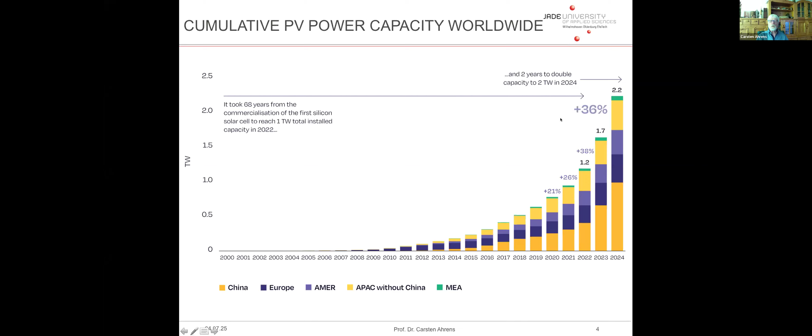What is the amount of PV waste? I use this from my colleagues from solar materials. You can see we are now here. We have worldwide an amount of about 250,000 tons of recycling volume, and the contained raw materials value is about 100 million euro. This is just for the years from 2022 till 2035.

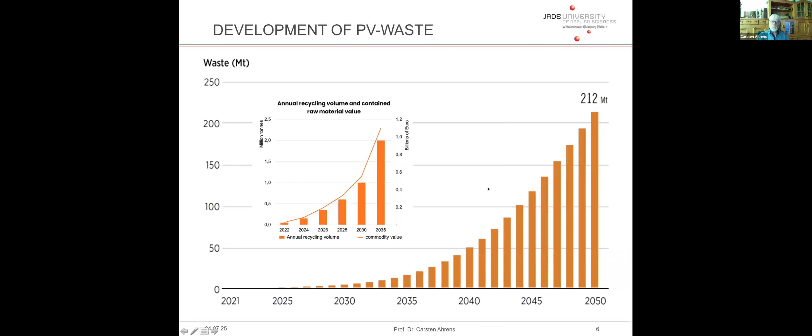If you see the whole development, you can see that it is estimated that we come up in 2050 with a volume of waste of 212 megatons. And if it is underestimated, as WFEO did before, then it could be much more. And if you see that with the amount in tons, you also see billions of material value, then you come up with volumes with worth which you cannot neglect.

The United States are, like Europe, on a rather high level. 220 gigawatt are installed, but most of it is within utility plants, where you harvest the solar. The second part is the residential part, which uses photovoltaics on roofs, for example.

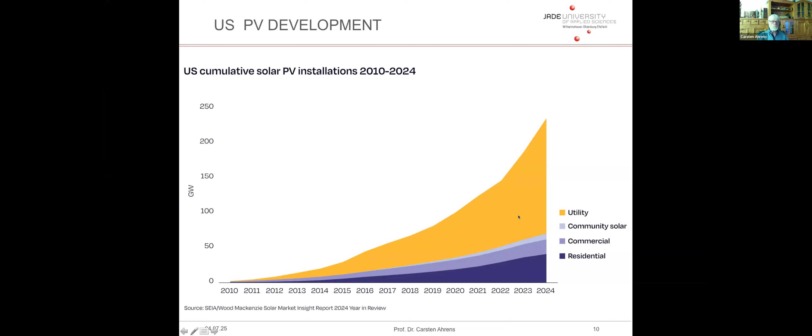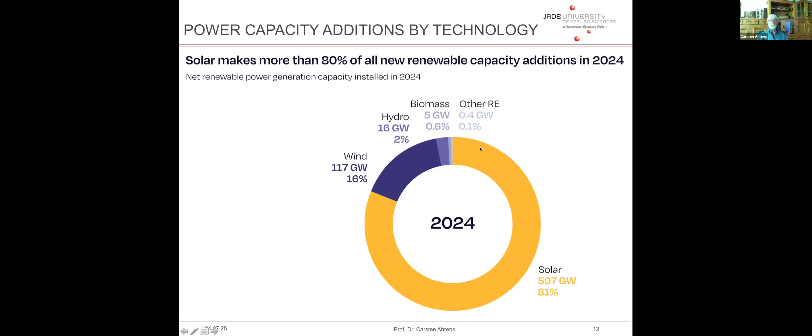If you have a look at all renewable capacity additions in 2024, you realize that solar is by far the biggest one. More than 80% of all renewable capacity additions are due to solar. Wind is the next portion, and all the other three can be nearly neglected.

If you compare it with other technologies, you can see coal and natural gas, the lines are going down, the slope is decreasing, whereas wind and solar are increasing. Solar is the strongest increasing power, and this or the next year, it will reach the coal line and then will become the biggest share of cumulative power capacity compared with all the others.

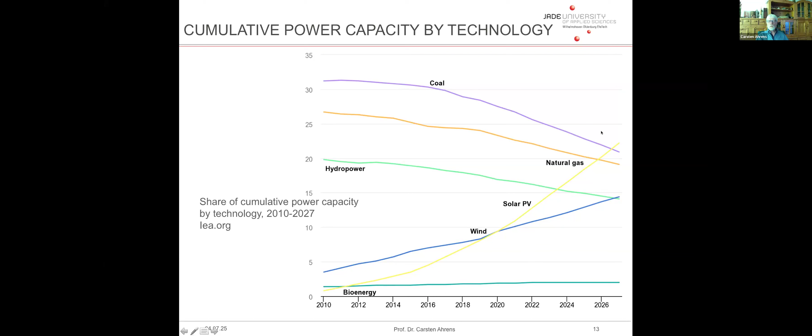So it is very important to think about the necessity for recycling. Just in Germany today, we talk about 60,000 tons of used photovoltaic modules which reach the end of their lives, and many will be disposed, likely also by landfill methods. But in 2030, a quantity of 1 million tons is expected. Then it's no longer possible to fill the land with this. And that's just Germany, so you can imagine worldwide it is a multitude of this number.

And these numbers have to be reinstalled. And in addition, a multifold has to be added to reach the net zero goals. But still, the existing shortage of rare elements becomes a real problematic bottleneck and could really stop further increase of photovoltaic electricity. So there is a need not only to recycle, but to install a circular PV economy. Germany hopefully could become the first country to do it on an industrial basis. This is what I hope for all of us.

Regarding the achievements we have with photovoltaics, you, Marie-Line, talked about the goal of clean and affordable energy for all people in the world. There's another goal, number 12, which we also have to look at: doing more and better with less, not throwing away all the material we used in photovoltaic modules. We have to recycle them and possibly reuse them in a way which makes it also interesting for companies involved in recycling processes.

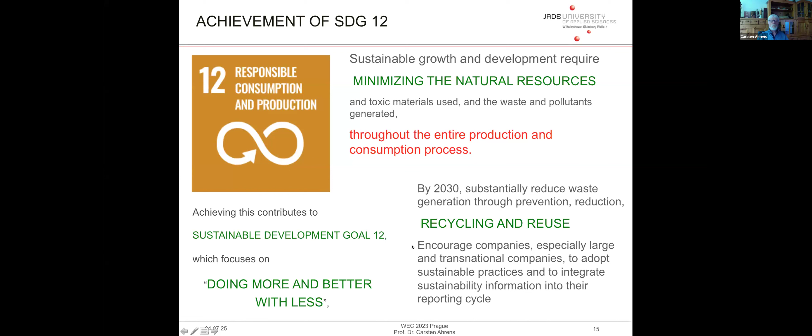The circular economy, as I told you, is a big part of the objectives within the EU, and in March 2019, the adopted comprehensive report on implementation of circular economy also included photovoltaics.

In Germany, we have at least two companies, Fraunhofer Center for Silicon Photovoltaics, together with Reiling, and Solar Materials. These both started to recycle on an industrial scale, and one of the results is these PERC solar cells, which are made from 100% recycled silicon and reach an efficiency of 19.7%, which is very good.

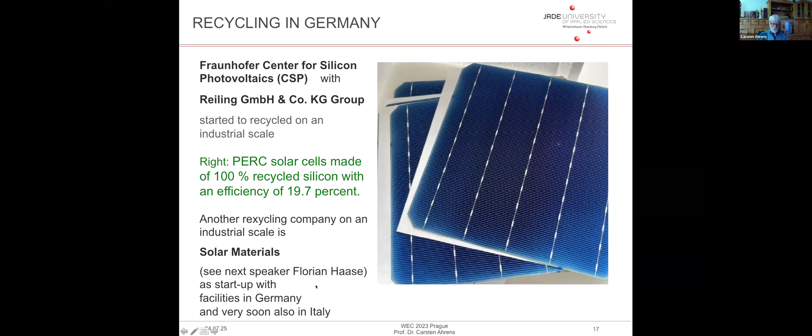And Solar Materials, our next speaker, Florian, as a representative of Solar Materials, is another very thrilling startup company with facilities in Germany and, as he will tell us, soon also in Italy. So it is a real European outlook for us. And this is the outlook which we need.

The outlook and the facet of this outlook should be sound industrial recycling of PV modules, which is interesting not only for these two companies I talked about here in Germany, but there are still some barriers in all countries. For example, a survey of US policies and initiatives by NREL identified several barriers. For example, there are data gaps about the amount of photovoltaic modules at the end of lifetime.

They talk about inadequate recycling technologies, and also this recycling is always connected with 100%, but the share is very often much lower. There's no infrastructure to collect these photovoltaics. There are regulatory uncertainties. When does a photovoltaic module reach its end of life, couldn't it be used longer, and so on.

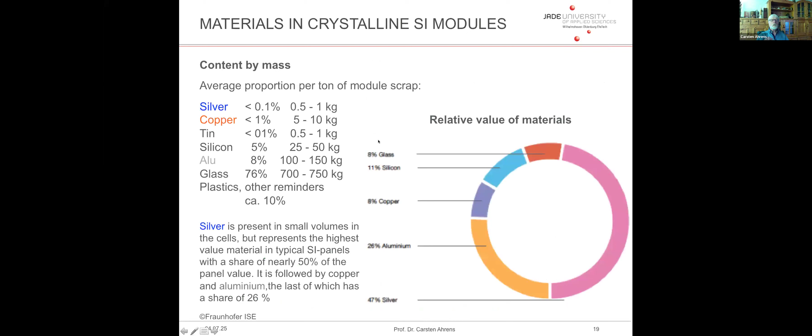So my end: PV electricity in a circular economy. This is a need for the energy future. Thank you for listening.

It's a great pleasure to present to you our solution for how to deal with the very strongly increasing amount of end-of-life solar panels. For this, we will present our recycling technology based in Magdeburg, Germany. We invented a technology that allows us to recover all materials, including the high-value materials, silver and silicon.

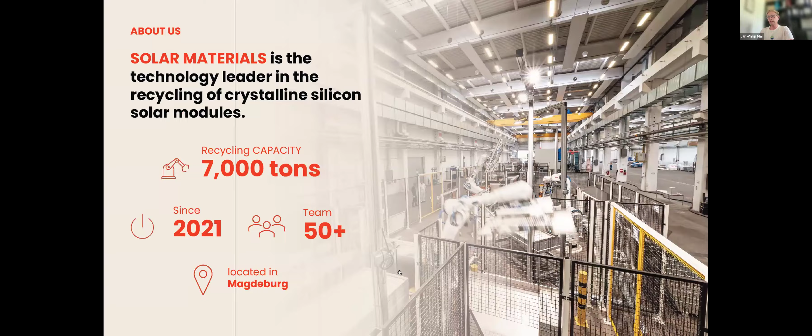For this we started in April this year with our industrial recycling line in Magdeburg, with a capacity of 7,000 tons per year, which is about 350,000 modules per year. And with this technology, we are using a reverse production process. So we remove every material layer by layer.

So we remove the glass section on the top, remove the very strong and difficult-to-handle fraction of the EVA film, get to the most valuable core of the solar cell, the silicon and the silver part, and then also remove the backside, which is also a plastic part.

We have identified 3 different types of end-of-life. There is the normal or typical technical end-of-life, which is about 25 to 30 years, the real end-of-life of the solar panels. But then we also see the very early loss of modules, at about 10 to 12 or maybe 15 years, with some production errors.

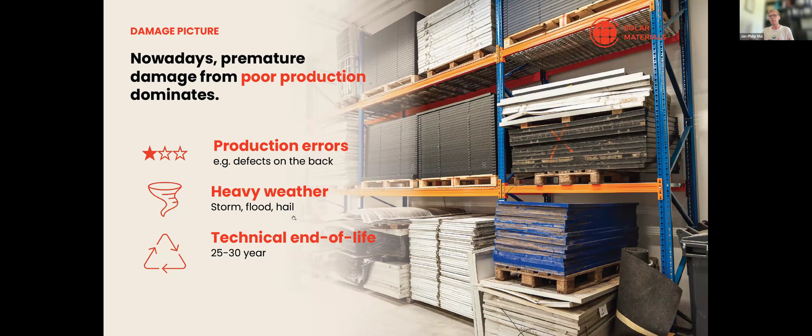There are some modules with defects, maybe on the back sheet or on the EVA foil. That creates a delamination effect and gets the modules back to us a lot earlier than the normal technical end of life. And as the third part, we have some modules with weather damage, like from storms.

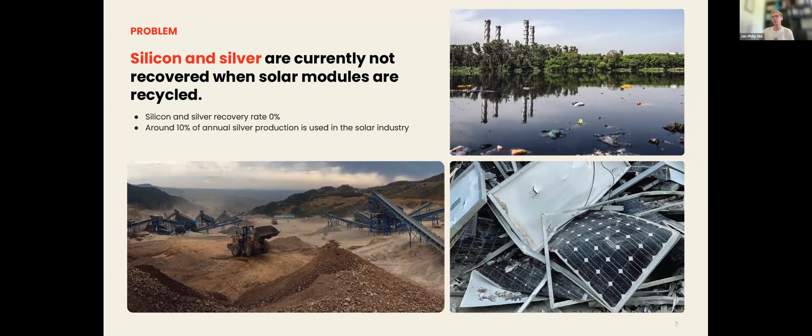With our recycling technology, we have the possibility to get all materials back, also the silicon and the silver. Both are critical raw materials with an actual recycling and recovery rate of 0%. So there's a very high potential to get these materials back with new recycling technologies. About 10% of the annual silver production is used for the solar industry. So it's very important to get this material back and to close the circular economy there.

That's also very important for the economic part, because silver is about 50% of the value of the solar modules, even if it's only a very small weight percentage of the solar panels, but together with the aluminum, it makes this a profitable recycling technology.

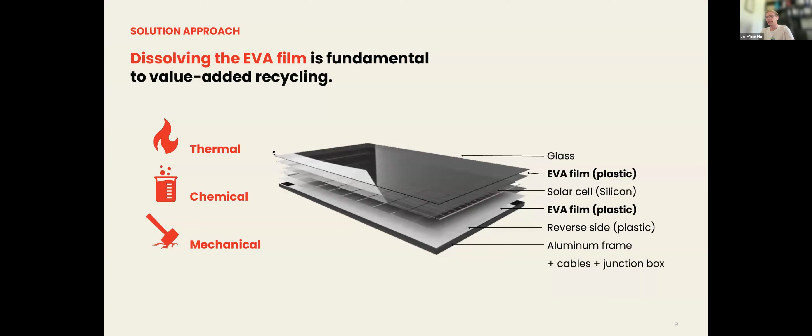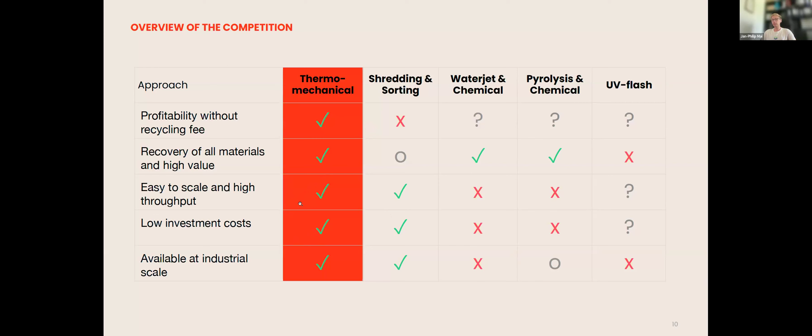To get to all these layers, we invented a thermo-mechanical reverse production process. So we remove it layer by layer, and instead of pure mechanical like shredding technologies, or instead of chemical recycling strategies, we have a very economical and also ecological setup, that's very highly profitable and very easy to scale up. That's also the plan for our next years.

So we start our recycling process by removing the junction boxes and the cables to get to the copper and the plastics inside these cables. Then we remove the aluminum frame. These are both standard processes, but then we come to our core patent to remove all layers, layer by layer, with our delamination process, and to recover also the silver from the silicon fraction, to get separated silver and silicon material, both for refining and to get it back into the circular economy.

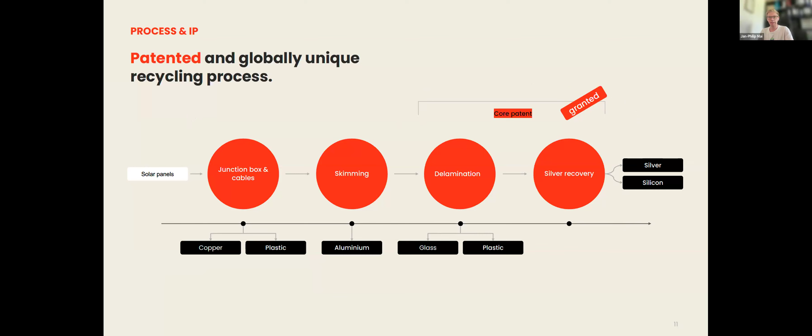Now we have the capacity of our first line with about 350,000 modules per year. We are planning to get a second line next to it here in Magdeburg, Germany, and also to increase our recycling capacity towards Europe in the next year.

For the recycling materials, we start with the aluminum. It's a very valuable raw material, but this is a very common recycling strategy, so very easy for us to get this material back. Also the copper, the glass; we get a very high purity glass, so this we can use as packaging glass. The plastic is going now for thermal valorization, but later on we plan also to recover the plastic fraction.

And our core element is to recover the silicon and the silver, both very critical raw materials and highly valuable. The silicon we use, for example, as an alloying element, or to get back to the silicon industry or the battery industry. And the silver can also return to the circular economy as a second life material.

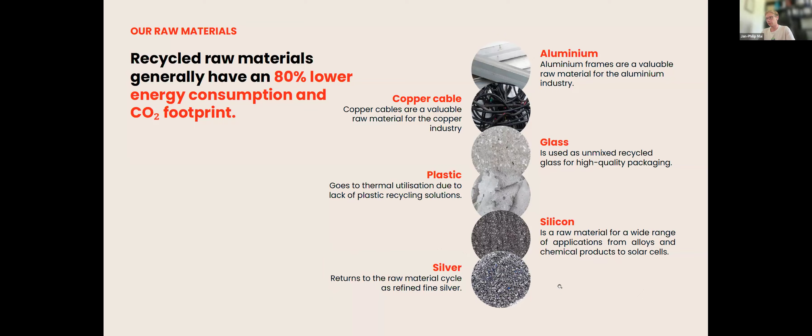For this, it's very important to recover all materials, with a very strongly increasing amount of solar panels. So we are planning to expand our recycling capacity towards Europe, first to build up more recycling lines in Germany, and next year we plan to build our first recycling line in Italy to increase our recycling capacity to 35,000 tons by the end of next year. So thanks so much. That's from my side, the recycling strategy in Europe, especially for Germany.

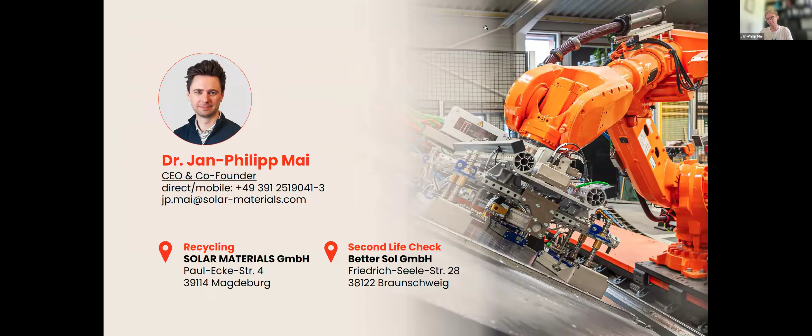Thank you very much for your presentation. This shows that there are concrete, operational solutions already available in different parts of the world, and this is very important. This is also one of the purposes of the World Federation of Engineering Organizations, showing that innovative solutions already exist to the different issues we have to face. As you have seen, we chose to mix academic and industry presentations, exactly to show that mix of solutions and give the big picture.

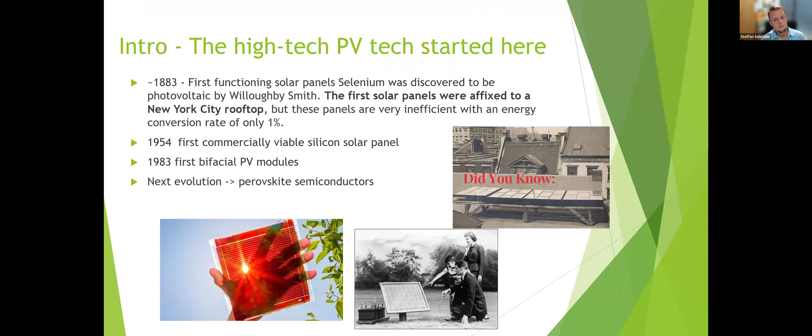And one of the big things is there's not just silicon-based solar panels that we've talked about now. Within South Africa, we also have thin film panels, quite a few thin film type of technology, so CIGS panels being installed, and also a very large plant with cadmium telluride panels still in operation now. And so our recycling solutions are not just focused on silicon-based solar modules, but on all three different types of PV modules.

So we have a specific line for silicon-based module recycling, thin film type recycling, and also the effective recycling and recovery of cadmium telluride panels. And within the cadmium telluride panels, we are working on recovering cadmium telluride as an active material for trading, so that it can go back into the manufacturing part again.

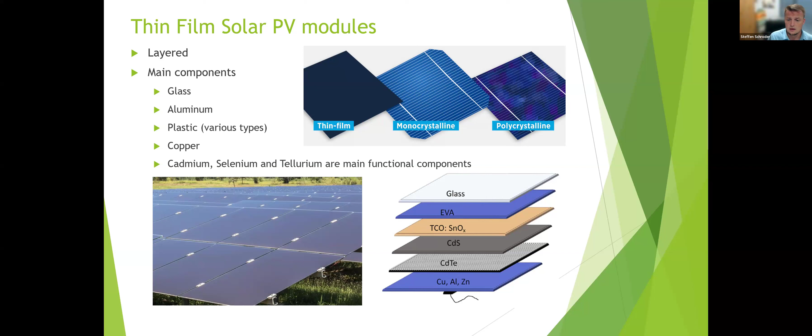So why is this important? Well, we spoke a lot about silicon panels, and we spoke earlier about the fact that silicon panels need to be recycled for its rare earth minerals or silver. I've been in a lot of conferences and discussions where we spoke about the need to recover the silicon and silver, which we are in the process of doing. So we are capable of recovering the silver, and we're busy improving our technology to increase the purity of the silicon that we're recovering.

Why is this important? Because the PV module production market accounts for 20% of the entire silver production worldwide. What that means is if we want to have a sustainable development and continue driving PV installations, it is vital that the silver and the metallic silicon is recovered and goes back into the production. It'll help us decrease costs and ensure sustainability long term within the market.

And we believe that as a recycler, it is an opportunity for us, but it's also a responsibility for us to continue to valorize the fractions that we're recovering, and bringing them back into the circular economy.

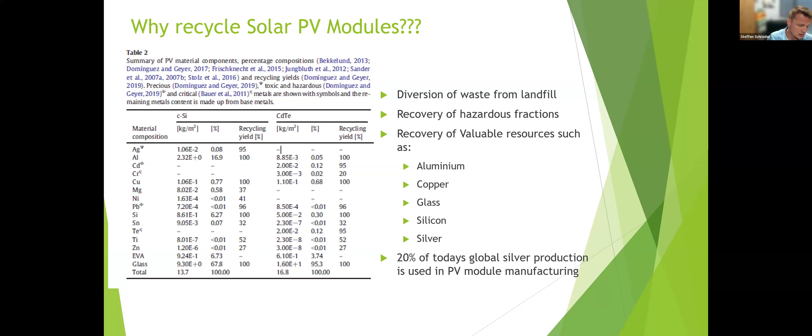Now, how do we do that? Well, Ismail spoke about this earlier. There's a legal background within South Africa. We have the constitution that everybody has a right to a clean environment. We have a Waste Management Act that banned all hazardous waste from landfill. So silicon or any type of PV modules, any type of electronic waste is not allowed in landfill.

Unfortunately, what is legislated and what happens are two different parts. So we also have another more recent legislation, which is the EPR legislation, extended producer responsibility legislation, whereby OEMs are becoming liable for this.

Because one of the things that a lot of people here are not talking about, and which is important, is that historically and even now, the recycling of PV modules is a cost-intensive procedure where we're very much struggling as recyclers to make this a cash-positive and positively contributing part. It actually costs more money to recycle the panels and to recover these fractions than what we can gather out in the back end. So the entire value chain, unfortunately, always requires something that we call a gate fee. I'm sure everybody's very much familiar with that.

This is just a little bit of a background of what this means, the EPR regulations, and what it covers. It covers all EEE, lighting, and paper and packaging. It was implemented in 2021. And in essence, if everybody was compliant, which there's still a compliance uptake, from January 2022, any products that were coming in would have been covered under these EPR regulations, meaning that the recycling, paying for recycling, any gate fees that are there, any transport costs would be covered by the regulations and by the OEMs.

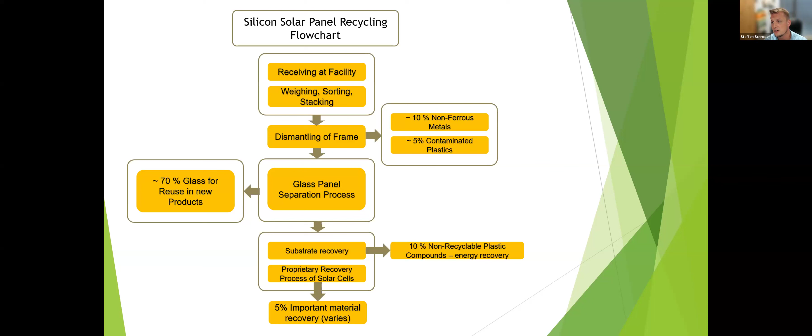So just a quick overview. We've seen very detailed descriptions of technological solutions. We're using predominantly a mechanical system for the recycling and recovery of our cells. We've been able to lean very heavily on the existence of a very good mining infrastructure, mining companies and mining technologies. That has allowed us to build our equipment to mechanically recover 95% of the panel, and only the last 5% of the important materials goes through a chemical process in order to recover our metallic silicon and silver.

Now, I spoke earlier about the fact that there's different types of panels in the market, and as part of communicating with various stakeholders, we've created these charts: how much of a PV module is actually recoverable and how much of it can be recycled. The reason why we're measuring these two indicators is because we pride ourselves on being a waste-to-product company. A lot of recyclers recover a product, sell a raw material, and then somebody else makes something else out of that.

We are following the WEEELABEX and CENELEC standards, and we're going not just level 1 recycling, but two levels down, which means we recycle the PV module. We create aluminium, copper, silicon, metallic silicon, silver, the silver batch. Then we have a second manufacturing. So we provide this either to another of our offshoot companies that manufactures products out of that, such as our glass, or to other partner companies.

And then we actually trace where these products go, and we also identify their production efficiency. Because when we're looking at this circular economy and closing these loops, we need to understand that it's not just our efficiencies, it's the product that we manufacture. How easy is it for the next person to make a product out of that, and what is their waste percentage? Because any manufacturing process has waste.

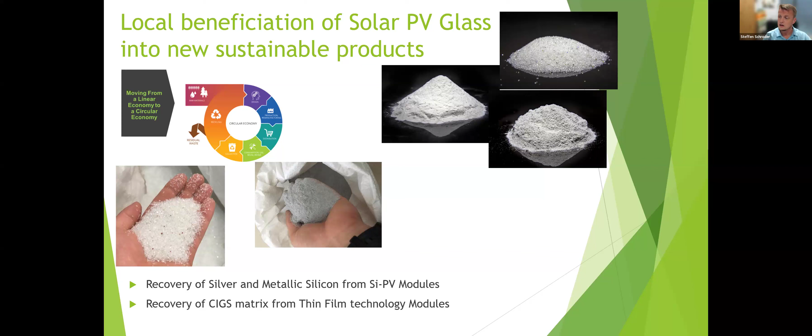This ends the part of South Africa. And now we will switch to Australia and how PV recycling is organized in Australia, first starting with Adrian Piani, who will present to us how PV recycling is done currently in Australia. Adrian, if you can. Thank you, Marie-Line. It's great to be here. And James, if you could share your screen, we'll share our slides. We'll provide a brief overview of the PV industry recycling in Australia, and then hand over to James Petesic to give a more detailed view of the technology and what's happening. Thanks, James. You go to the next slide.

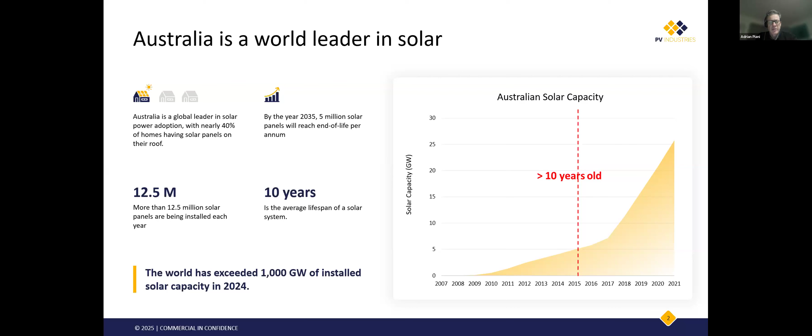We're saying the average lifespan of our solar systems is around 10 years, and they can last longer, but the reality is that they are or can be pulled off earlier and swapped out. So you can see the graph on the right there really showing that aggressive nature of the increase of solar panels, and the reference there to 1,000 gigawatts of installed solar capacity globally in 2024. Thanks, James. Next slide.

So there's some great work done by Dr. Rong Deng, Solar Panel End of Life Management in Australia. You can find that report online. That report estimated that we would have 1 million tonnes of PV waste by 2034, some of that being the small scale solar panels, i.e. the ones on our roofs, and others at larger scale, bigger than 100 kilowatt systems, which we're seeing deployed across Australia as well. And the total material value from those end-of-life solar panels is projected to surpass $1 billion Australian.

As I mentioned, we're not necessarily getting the full technical life of our solar panels, and that third dot point there, the Australian government recently announced financial support to install household batteries. And what we may find is that with that program, as people invest in batteries, they might invest in updating their PV system at the same time. And so those panels are coming off earlier than they might have without the batteries being implemented. So at the moment, our existing recycling options are overseas reuse, aluminium recovery only, or full panel recycling. And James will talk to that.

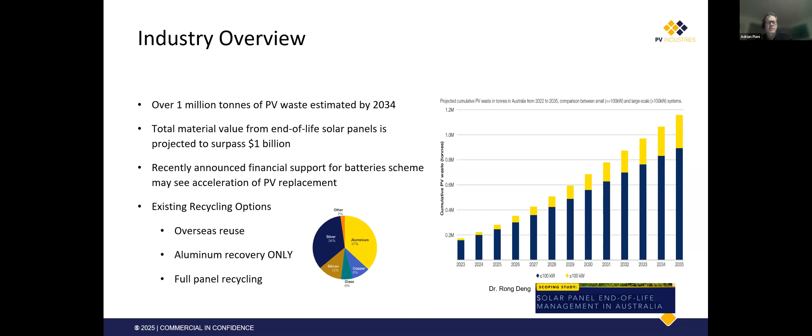Next slide, James. I just wanted to give a bit of an overview of what Australia terms product stewardship, circular economy.

It's really our sort of high-level policy view of how we encourage the circular economy and reuse and recycling across many products. As Carsten mentioned, one of the great things we can do is make sure when we design our products for deployment, we design them with the end in mind so that we can encourage their reuse or recycling. And we hope that that will or can occur in the PV industry sector.

Notwithstanding, we have so much tonnage of PV systems out there anyway that we have to deal with what we have at the moment, which is a wide variety of systems, perhaps not designed as well as they could have been to support recycling at the end. But notwithstanding that, I think as an industry, we should still be looking at our design processes.

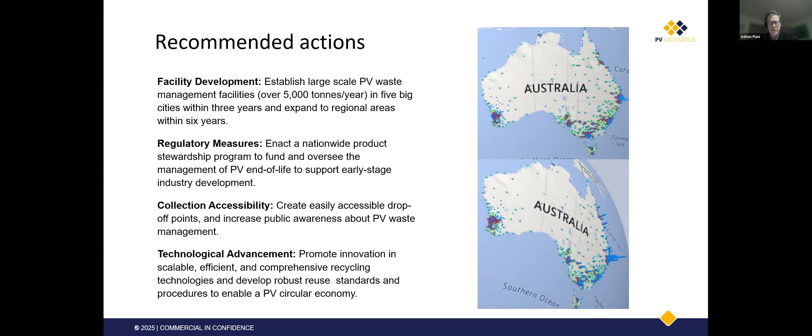Thanks, James. So I'll now hand over to James Petesic, co-founder of PV Industries, to give a practitioner's view of technology in Australia. Thanks, James. Thanks, Adrian. Hi, everyone. As you can see, that is me. My name is James, and I started PV Industries back in 2018.

So, as mentioned, the business has been running for over 7 years now. And when I started the business, the primary goal was to recycle solar panels, stop them going to landfill. It was quickly discovered as we started to operate that we had to face challenges in the reverse logistics, so getting the panels back to us in the central location. Once we got them back to us, what machinery were we going to use? I went out and bought an Italian deframer. I think it was in 2019. It arrived 2 years late and broken.

We quickly realized once we started using it after fixing it that it was only able to process about 20% of the panels that were in the market. As one of the previous speakers was talking about, the variation in size was the primary reason that was the case. So we went down the path of inventing our own machinery.

Once we did start recycling panels, we were creating products like solar glass, which people had never heard of. So trying to sell a product that no one knows what it is, we had to come up with new end markets to sell these products to, or educate the market as to why they should be buying ours versus another type of glass. And then, as you can see below, we've gotten into the solar panel testing and also lithium-ion battery space, but I'll focus predominantly on panels for the discussion today.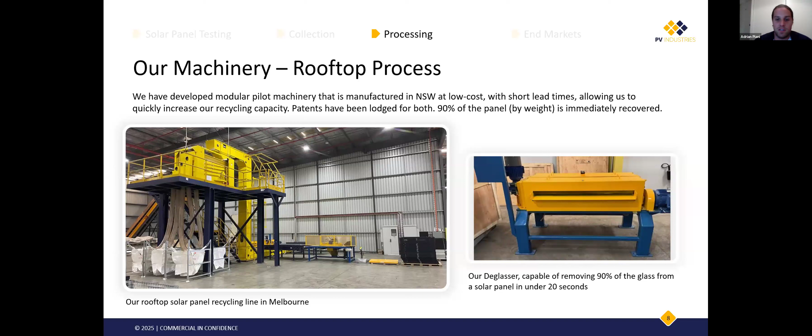The deglasser strips off the glass in a very similar fashion to the previous presenter, with the crushed up glass, super clean. And what we're left with is a 1 millimeter thick flexible solar panel, which is effectively the cells encapsulated by the EVA.

We just started to go down the path of accepting panels from solar farms. And whilst people think solar farms have only been around for 5 to 10 years, why are they reaching end of life? Well, the farm itself is not reaching end of life. The panels get damaged during construction. And when you have 1 million solar panels on a farm and the damage rate is 1%, that's still a large volume of solar panels.

So we received bifacials and we attempted to deframe and deglass, and we quickly realized that it needed a different approach. One, because the machinery wasn't suitable. The contamination levels were too high. And two, the throughput of our residential line was not meeting the speed at which we were receiving, 3,000 panels, 4,000 panels per day. We couldn't keep up.

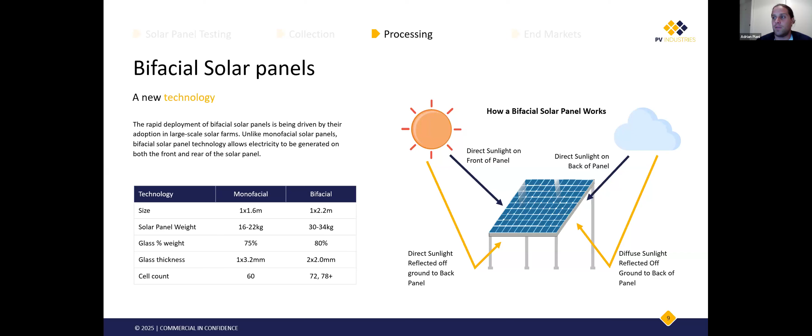So we went down the path of developing a utility scale bulk process, which is capable of processing 10 times the volume of what the industry currently achieves. It runs at about 20 tons an hour, and that was designed to receive 3 B doubles in one day, and specifically for bifacial solar panels rather than the monofacials.

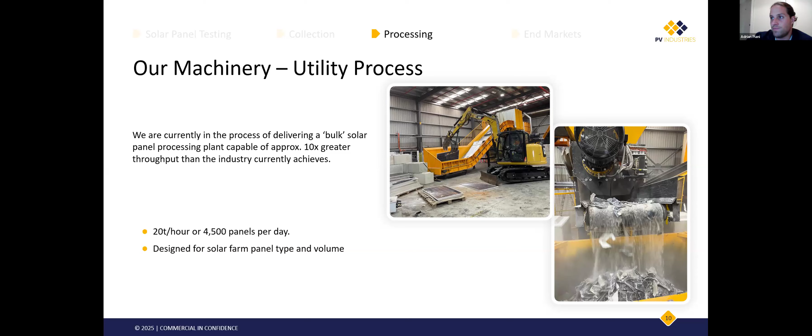So just to give you an idea of what the products look like, above the line, we have the whole frames, the glass and the laminate from the monofacial or the residential line. And below the arrows, we have the shredded aluminium, glass, and what we're calling the EVA sandwich. So once we get to step 3, we will blend up the laminate and EVA sandwich into what we're calling solar metal, which is effectively a powderized solar cell. That will go through a chemical process to extract 99% pure silver and 99% pure copper.

So we have today in practice and in place these 2 lines. The third step, the chemical extraction, we've extracted that silver button that you can see in the top right of the screen at lab scale. So we have proven that there's silver in the cells. We've proven that we know how to get it out. And now we're in the process of trying to raise some capital to go out and purchase the chemical extraction line so that we can be one of the first companies in the world to be commercially extracting silver from the solar cell or solar panel.

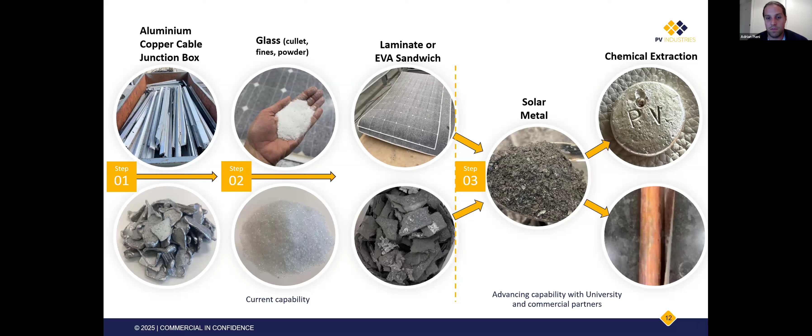Now, in terms of the end markets and where these products go, the metals are pretty straightforward. They all have global commodity prices that are traded, and we can determine the price of aluminium, copper, and silver really easily. When I say fairly easy to get to, the copper cable and the frames are fairly easy. The silver and the copper in the cells, not so much.

Where the interesting part becomes is with the glass. Like the previous speaker mentioned, there's such a variability in the end markets that you can sell your glass to and the prices that you can receive. In New South Wales, which is the state that Sydney is in, on the East Coast of Australia, the construction industry demands over 1 million tons of recycled glass per year to put into things like concrete and asphalt as an aggregate. Although this is an incredibly low value, it is incredibly high in the volume that they need. So it's a great market as volumes increase, like you've seen in every geography around the world. The graph of installation looks very similar. So there will be an immense demand for solar glass.

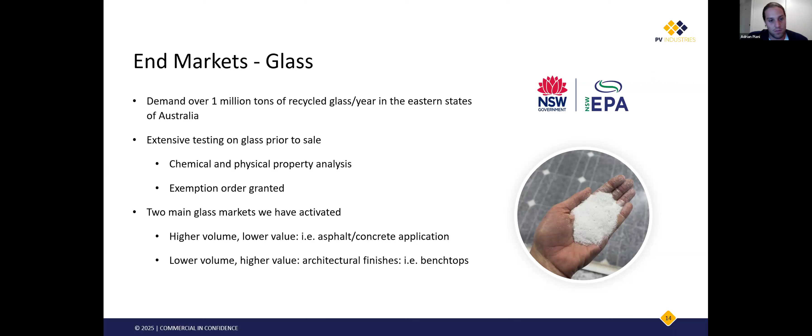The other market that we've activated is a much higher value, but lower volume comparatively to our 1 million tons per year. And that is architectural finishes like manufactured stone benchtops, where we can get 3 to 5 times the price of the construction market. However, their demand per year is obviously much less than 1 million tons. At the moment, we are able to sell all of our glass to the higher value architectural finishes application, but it is also very important to keep the higher volume construction applications active, so that when we have much larger volumes of glass, we are able to sell it to those businesses as well.

And finally, as a few people have alluded to, keeping things like aluminium in circulation for as long as possible is super important from an environmental point of view, because creating aluminium from recycled aluminium consumes 90% less energy than refining aluminium from bauxite.

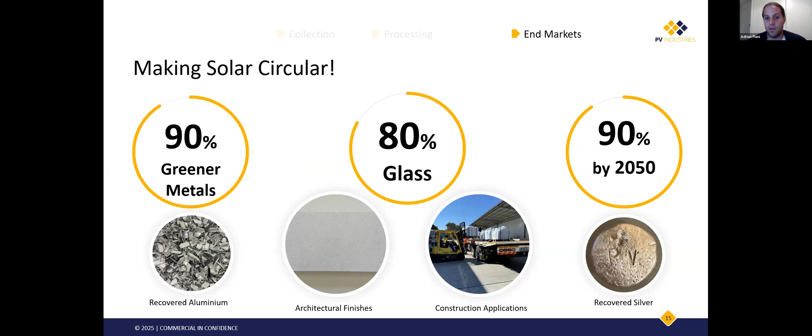Solar panels are made up of between 75 and 80% glass, depending on if they're monofacial or bifacial. So having a robust market or markets for the glass is super important to ensure that we can achieve high recovery rates. And then finally, if we do not start recovering the silver that is contained within solar panels, by 2050, the solar industry alone will be consuming 90% of the world's silver supply.

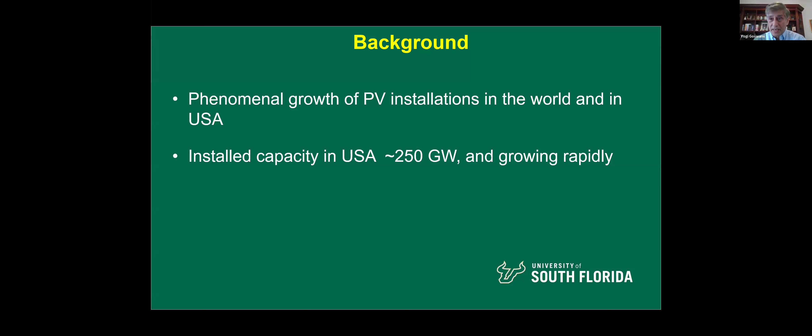And at that point, it'll probably be people like me who think about solar for the world, for our climate, who may continue to buy, but others may not buy at that time. So that's an unfortunate development in USA. So as far as recycling is concerned, the publicly available information, if you look into the media and other places, you might think that recycling picture in USA is very optimistic. Reality could be different. I hope I'm wrong.

Now, current recycling regulations: the end of life disposal for solar products in USA is governed by the Federal Resource Conservation and Recovery Act, RCRA. And so this act considers a majority of the solar panels as solid waste. In other words, they could go into landfills. And if the panels have materials that exceed the RCRA threshold for toxic materials, then they are considered hazardous waste. So as far as the federal government is concerned, there's not much about a necessity of recycling.

However, the Solar Energy Industries Association in USA is working collaboratively with the regulators to develop implementable regulations. Now, in USA, states are the ones who really decide what happens over there. And most states have policies on the books. But unfortunately, just very few have implemented those policies for recycling.